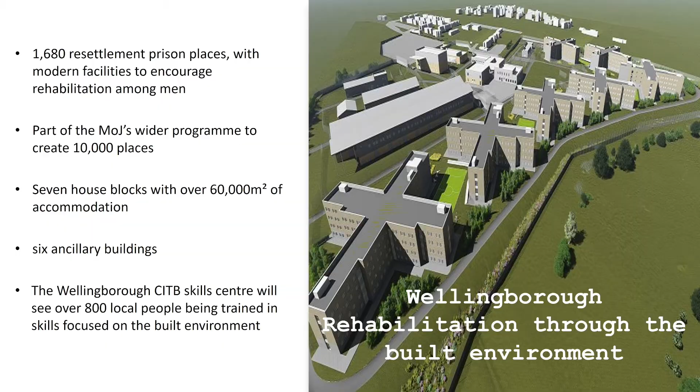Afternoon all. I'm just going to set the scene for my colleagues to present and talk about the hard work that comes together. In the first instance, talk you through the prison, which is a 1,680 place prison based in Wellingborough, and it's on a platform design that will be rolled out to build out 10,000 places across the country. It's a different prison to what's historically been built, in that it's a rehabilitative prison, and it's based around skills and reintegration of society, and its main focus and aim is to cut reoffending.

To deliver the project, we pulled together a supply chain from across the country, maximising digital and off-site, and we're pleased to say we've got two key speakers from PCE, who have integrated the precast for us, and from Mastalloy, who have developed new windows and doors for the prison that we sub-assemble and then take to the precast factories to install. But there's an underlying purpose to everything we do, which is the drive of our clients, and this prison is 70% more efficient than the current stock, which is predominantly Victorian, and has barless windows, which is the first in the UK to do barless windows en masse, and it encourages family engagement and smart buildings.

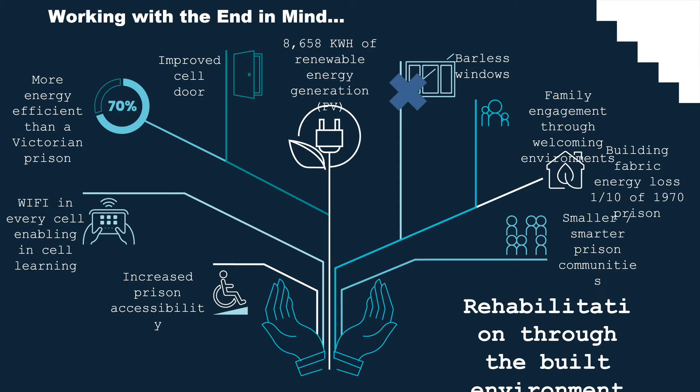Further ado, I'll hand on to Simon, who is our specialist integrator for our precast solution.

Good afternoon. So, I suppose just to give you a bit of an overview of our role as integrator, because it's not a familiar term in construction, but it is relatively familiar in the off-site world. Essentially we're taking the concept design defined by the client, the Ministry of Justice, and the architect and the design team, and what we're wanting to do is dismantle that design and turn it into a kit of parts. The kit of parts can then be manufactured away from the project, and then what we've got to try and do is bring that kit of parts back together and assemble it on site.

Now originally we were transitioning from a different design solution, so there was a piece of work to do around the re-coordination of that design. Essentially we're going to consider all of these points around the circle: program, sequence, digital, logistics, methodology, design management coordination, interface coordination, smart systems integration, supply chain management off-site, prefabrication or pre-assembly or both, cost, validation and continuous improvement, to essentially develop a solution that can be made away from the project and assembled on site.

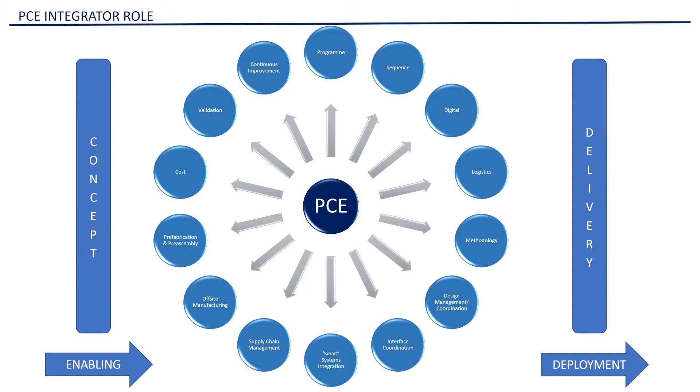Just a bit of an overview of the scope. We're not actually delivering all the project, but the scope that we are delivering, I would guess, represents circa 70% of the project. We have the entry visits building, which is in the top left-hand corner, which is a very bespoke structure. So most things are one-off within this building, a little bit unusual for off-site, but delivered using a hybrid type methodology, combining precast concrete with structural steel work with in situ concrete, essentially to give a fast-track construction solution to quite a complex building.

We've got the CASU, which stands for Care and Separation Unit, which is a specialist accommodation unit up at the top of the site. But then the main crux of what we're delivering is the house blocks, the accommodation blocks. So we've got 7 of these blocks, which are identical, running down the bottom of the site there.

So just to give it a bit of scale, the entry building's about 7,000 square metres. The care and separation unit's about 1,200 square metres. And then the house blocks represent about 60,000 square metres of construction.

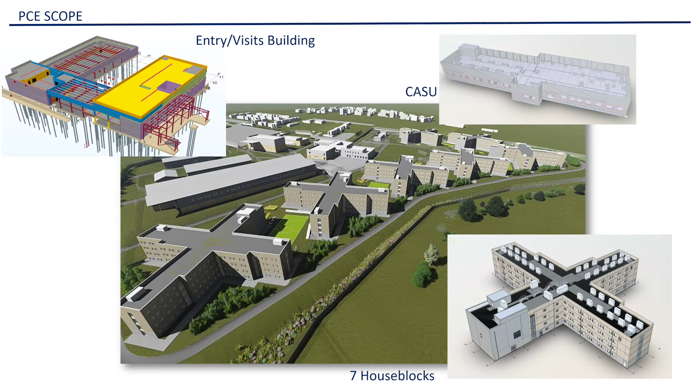Now, one of the key metrics that we worked from was the programme that the contractor wanted to deliver the project. So ultimately, there's an end date the client needs the facility, so we're working back from that end date with the main contractor, and essentially we're configuring a solution around that aspirational date. This brought us to a 40-week programme to deliver the project, which means essentially we've got to construct around about 1,500 square metres per week. Most things that we've done have essentially been configured around that driver.

So, defining the kit of parts, we need to take the buildings apart to put them back together again. The process we go through uses an existing system that we've developed over the years. Some of that work's been done with Kier, some with other contractors, and the Ministry of Justice as a client.

We need to take the functionality and the specification of the buildings, the programme as I mentioned, and critically the logistics and the sequencing. Logistics and sequence is absolutely fundamental to offsite. We need to take some of the systems integration, which I'm going to describe, and some of my colleagues are going to describe in later presentations.

We need to take the assembly methodology, how we actually put this thing back together again. We need to take the manufacture methodology, how we make it away from the site. We need to look at the supply chain and its capacity and capability to deliver a project like this. And then we look at the design solution, and how we essentially dovetail the different design aspects together to give a coordinated solution. All the time we're trying to balance cost and value.

What's probably key, and I hope you'll get this from the presentation—John touched on it very briefly—is that we've got multiple suppliers across multiple specialisms, all working together away from site to bring this thing together as a kit of parts and to give it the smarts that the building actually needs.

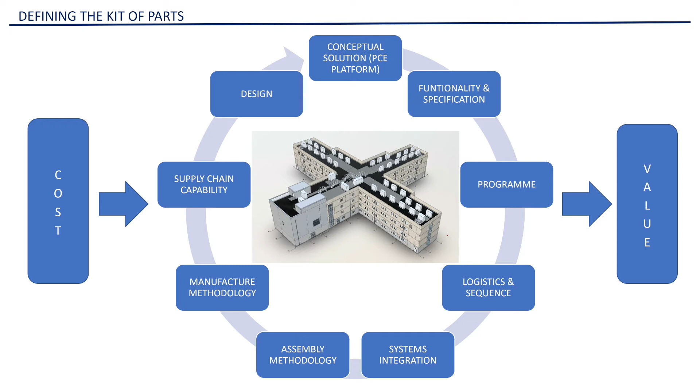So this is just an overview of the house block. There's typically 56 cells per wing, per level, with some miscellaneous support functions on one of the wings. So 3 wings are cells, 1 wing is a miscellaneous support function. The cells are based around a repetitious platform design, which I'll describe in a second.

Those cells contain things like ensuite facilities. They have the power and the data requirements for the cells. Then obviously there's finishes and functionality within those cells as a secure environment. But some of the key aspects of that design solution center around security, durability and maintainability because of the type of facility it is. It's just a brief overview of the platform.

The platform represents about 60% of the house block. So 60% of each of those 7 house blocks is this accommodation module. There's only 4 types of cell, which means there's lots of repetition within this componentization, which means it's really, really important to get the design solution correct because we're replicating it many, many times over.

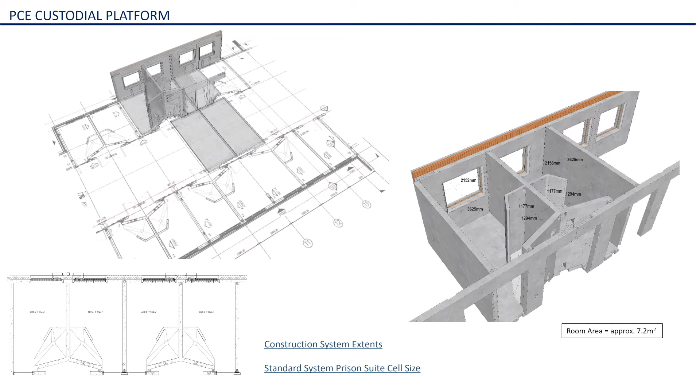But also key to that is the refinement of that design, because when you refine that design, the benefit amplifies across all of those cells as well.

There are 6 key component types. We have an external wall construction, which is a composite sandwich wall construction, where we pre-install the window system off-site. We have what is a special duct wall unit, which separates the cells—a bespoke unit to the prison system. We have some slabs, a mix of corridors and cell slabs; the cell slab I'll describe in a little more detail. We have some partition walls and some corridor walls.

Critical to us is how these components are manufactured, which influences the finishes. Critical to that is also the way these components are handled. Much of our consideration is less about the permanent design and much more about the temporary design—taking the units from the molds, handling the units, stacking the units, getting the units to site.

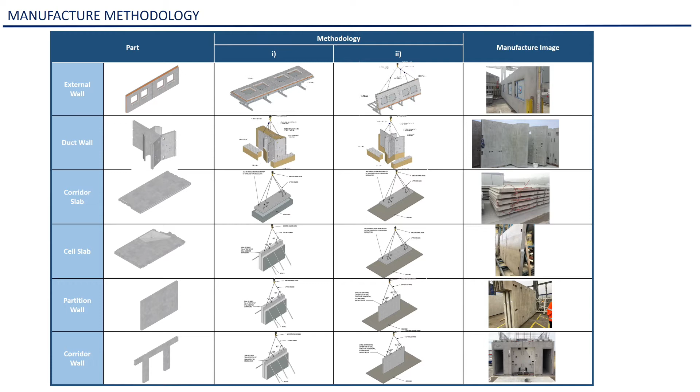We then need to look at the assembly. My analogy is a little like the car industry. If anybody ever walks around the car production line, nobody's ever looking for components—the components are where they need them. That's logistics. And when they take the component and put it into the car, they're not looking how to connect it into the car, it just connects. That's smart connectivity.

So much of our focus centers around the logistical aspects of getting these components where they need to be and when we want them, but also how they connect together, because that needs to be efficient, it needs to be safe, it needs to be effective, and it needs to perform in the way that these buildings need to perform.

Key to this as well is what I described before about the amplification of benefits or negatives. If we get something wrong, it replicates 1,600 times. If we get something right, it replicates 1,600 times. So for every minute we can save, every hour we can save, every little bit of reinforcement we can take out, all of these benefits amplify across what we're trying to deliver for the client.

This just touches on the temporary aspect. The temporary restraint of these components is fundamentally key and has to be built into the design solution, but also the health and safety of our operatives assembling these buildings and any other operatives working on site. So just as much design input goes into the temporary condition and assembly methodology as the permanent condition.

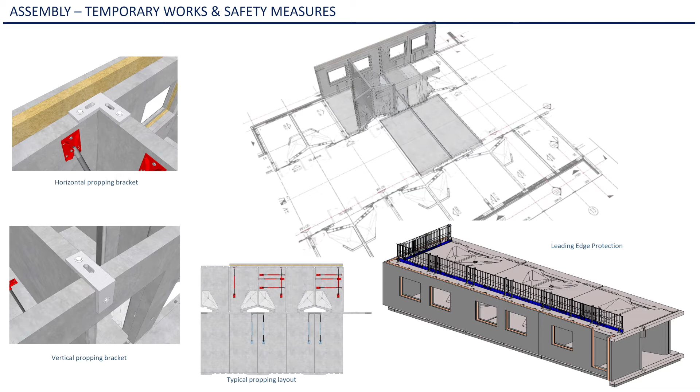This is the cell slab I described before. Within the cell slab, we essentially have 5 off-site suppliers coming together, integrating into one concrete floor slab. The floor slab contains underfloor heating embedded within it to heat and cool the cells. We have shower drains and shower feeds for an ensuite area, and the dished area to take the finishes for that ensuite. We factor all of those things into how the component is manufactured and how these off-site specialists bring these components together to integrate into that component.

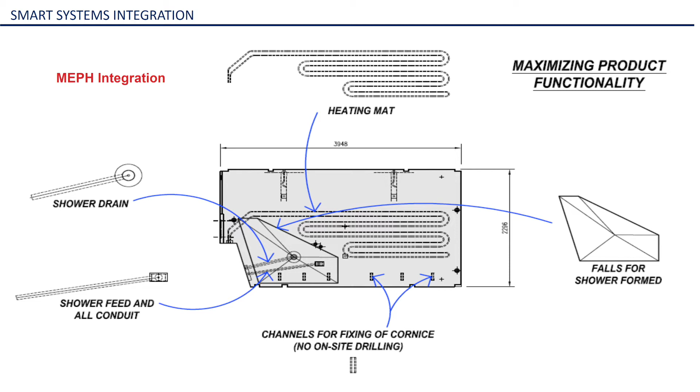This describes pictorially a bit more about the systems integration. M&E is critical to the facility, and the fact that most of the M&E is embedded within the structure, so people within it can't tamper with it, is key.

I touched on logistics and sequencing being key. A lot of work has gone in with Kier and other specialists working with us on site logistics and off-site logistics—the sequence in which cranes move around the site, how we get deliveries to and from cranes, how we work with other contractors and with the infrastructure around the site, which is ever changing. It's quite a challenging site in terms of topography and rainwater, so lots of that has to be considered.

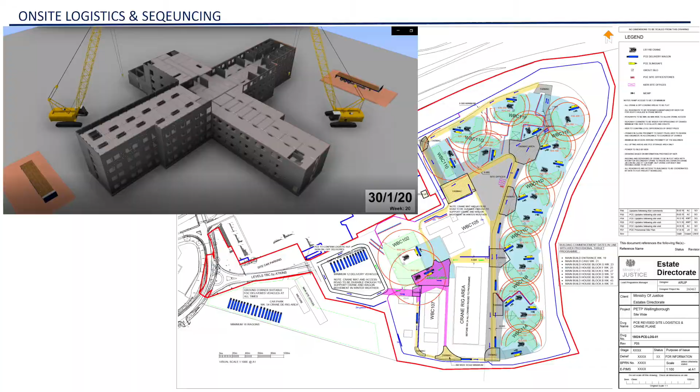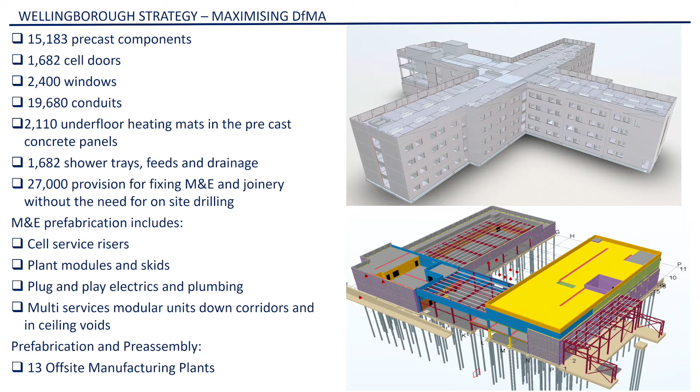Just some of the stats, which might get repeated again later: we've got over 15,000 precast components, over 1,600 cell doors, over 2,000 windows, nearly 20,000 conduits cast into the concrete, over 2,000 underfloor heating mats, and 1,680 shower trays. The list goes on.

Also fundamentally key to us is that what people see at the end is the finished component, but within it we've got the smart integration I talk about, and we've also got the reinforcement. Fundamentally, where things go wrong in our industry is when reinforcement doesn't fit with other components and the two things don't mesh together. This is where BIM and digital has really transformed our industry and our business. Now we're modelling reinforcement in 3D alongside the components, so we can check that all of these things fit together before we place concrete in the units.

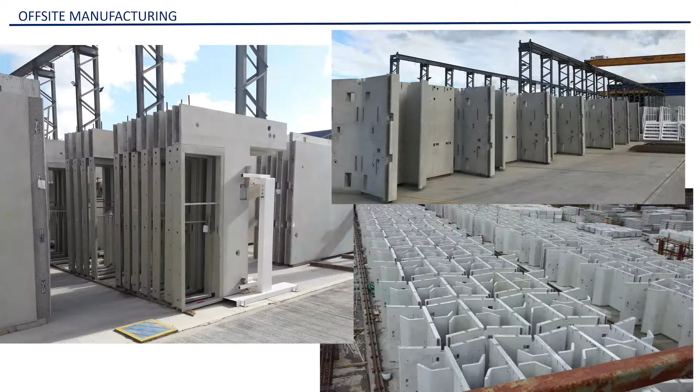This is just some of the units being stored off site. You can see on the left some of the units with the corridor units with the door frame set within them, and the cactus units, which are the specialist unit for the prison cell platform.

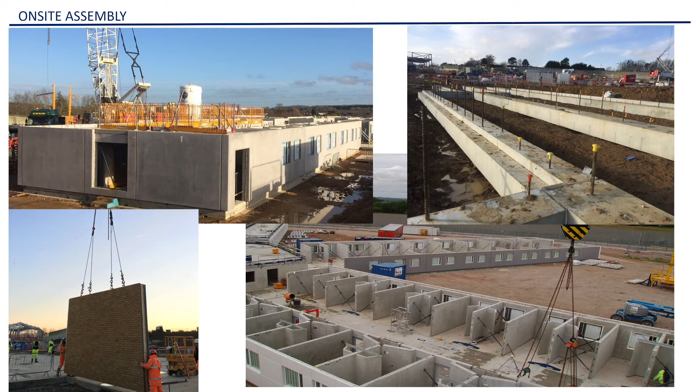Just some images of assembly. We typically construct somewhere between 12 and 16 components per day, with about 10 men per crane, so there's not a lot of manpower on site, but there's a lot of activity. You can also see in the top right hand corner we did precast ground beams on this project as well, so we're starting straight from the tops of piles, trying to do as much in terms of DFMA and off-site as possible.

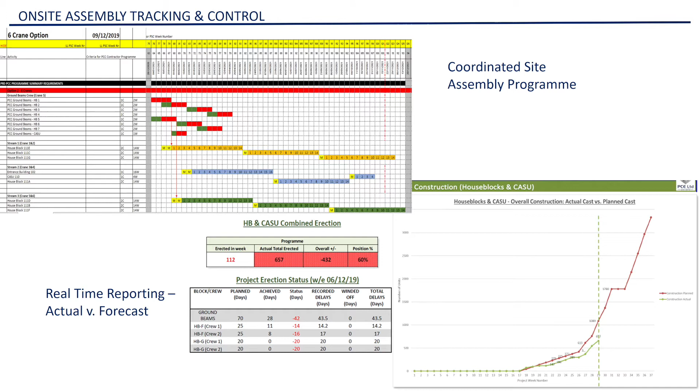Critical to getting this right is knowing where you are at any point in time in the process. So a lot of effort goes into monitoring and tracking the plan versus what we're actually doing. We do lots of things in terms of tracking progress and comparing actual through design, through manufacture and through construction. Rebecca's also going to talk about some of the clever digital stuff that Kier have brought to this project that really helped us monitor that real-time data and track actual versus planned.

Quality control is also a critical facet of what we're trying to manage and deliver. We need to ensure we're monitoring the quality process at each stage of the design and manufacturing process. So we have off-site coordinators working with the supply chain, monitoring and managing the quality of those components at each stage, so that when it arrives on site, we know it meets the specification, it's been validated and verified, and it can then be assembled.

This is some of the information that we produce for the guys to assemble these components, and then we track every component that gets installed. Essentially what we're trying to create is, as my managing director would call it, like a birth certificate for each component. So each component has all of its data about the quality process it's gone through, and all of this can be fed back into the BIM process and logged with that component as the asset management strategy for the client.

And then just moving forward, always looking to improve. So some of the things we have used and are using to develop the platform system for Kier and for the client: we've got past projects and the data that goes with them, the existing platform design, the Wellingborough design, some of the data we're capturing on the project which Rebecca will cover. We obviously have the BIM data which goes with the model, and we're doing some work with the Construction Innovation Hub around platform design, which will also feed into developing and enhancing this system.

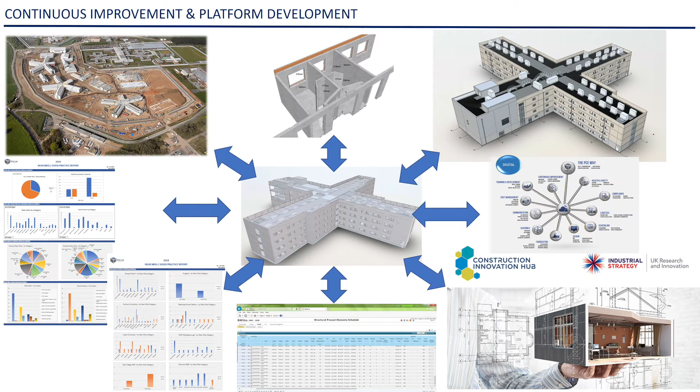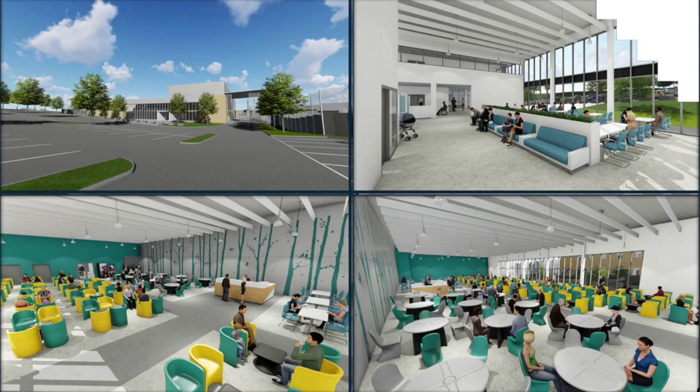Thanks, Simon. So as the guys have said, Wellingborough is really pushing the boundaries, both in terms of the scale of design for manufacture and assembly, platform design, and also digital advancement. And with that, we're really finding that digital tools are to a large extent the glue that helps us achieve some of our wider aspirations. But to achieve that, we need a client that's supportive of a digital drive, forward-thinking people, and as Simon said, a digitally enabled and committed supply chain.

As part of that, as you can see from the image on the board, Wellingborough, as John outlined, is all about trying to find a facility that facilitates rehabilitation for those that will reside there. But actually, transformation doesn't just happen in operation, it's happening for us in part of the construction phase. To date, for example, we've won Digital Training Initiative of the Year for a digital apprenticeship scheme that we pioneered as part of this project. Wellingborough is also the first Kier project that's got project-dedicated data analysts, which is a huge step forward for us.

Our first challenge was how do we reflect and transfer everything in terms of our digital intent and aspirations into something tangible and deliverable, something that can be understood by the many and not just a few. The concept we came up with, and our digital lead is in the audience today, is what we've referred to as our digital mission statement, a jazzy title for what in effect is a digital poster. The idea is that we set the digital scene and explain the various parts of our digital aspirations.

For example, what's the BIM documentation? Trying to take the language of employer's information requirements, asset information requirements, and make it understandable. What's our model breakdown? In other words, who's producing what and why? We're also looking at what digital tools we're using on this scheme, more of which I'll describe in a moment. We also go through our digital workflows, including quite specifically to Wellingborough, our drone workflow. Also looking at our digital calendar to make sure we're setting the right basis in terms of model federation and exchanges.

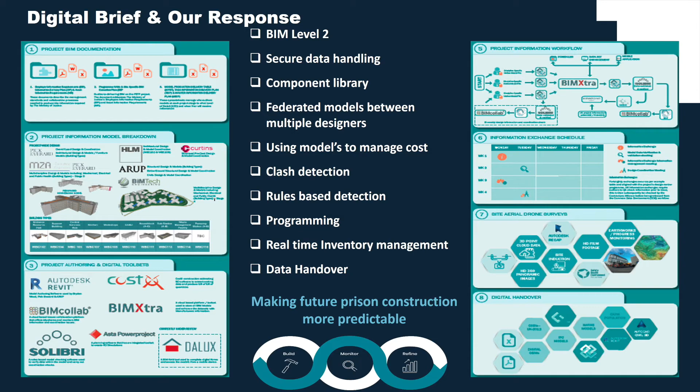At the heart of the document is our digital action plan. This breaks down each of the tasks, assigning them to individuals, determining which is a client requirement, which is a Kier requirement, and what benefit we expect from each. We've linked this action plan to a Power BI dashboard where we can self-evaluate each month to give us a level of granularity in terms of our digital performance.

So our aim at Wellingborough was very much to deliver beyond BIM level 2 and ensure secure data handling throughout each of the project life phases.

For example, from federating the models with multiple designers using these, to developing a digitally rich component library from which we can undertake our fabrication drawings, developing inventories for real-time asset management, and as Simon mentioned, managing progress and quality of off-site and on-site works, to eventually provide a data-rich handover to the client.

I guess the ultimate aim is to create a digital feedback loop by which we can make future prison construction more predictable.

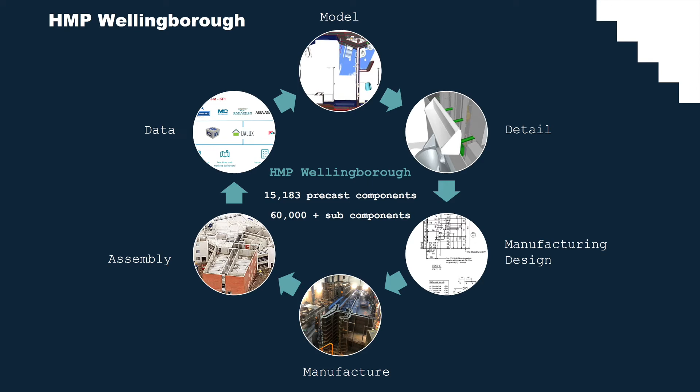Starting with the initial design phase, as integrator for this scheme, Kier is responsible for managing a really diverse team. To give you some idea of that scale, we have 6 design consultants and to date have had over 70 contributors to our project information model.

It might not sound particularly sexy, but one of the important parts is ensuring we get standardisation of naming conventions. So actually looking in the common data environment and finding that we have uniform naming, and using TIDPs and MIDPs have allowed us to link this into dashboards to ensure we have more access to managing the progress of design.

So that digital management at scale can be seen with some of the statistics at the moment. The project information model currently consists of 283 separate models. We've had 18.5 million components go through our Solibri rule sets to date, and we're aiming to achieve a data handover to the client that will consist of over 6 million pieces of data.

Now when you look at a traditional asset handover to a client, probably circa 70% of the maintainable assets are within the MEP sphere. So one of our key challenges was ensuring we had continuity of MEP modelling throughout. At a very early stage we took the decision to use one organisation, BIMTech, to undertake all the MEP modelling from cradle to grave.

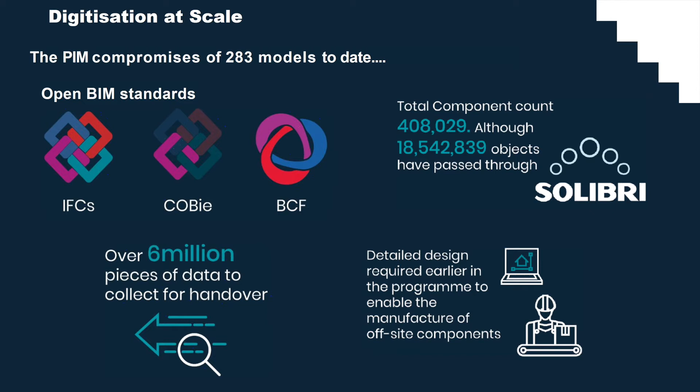All of this is with the aim of focusing on getting detailed design earlier to enable the manufacture of off-site components.

So as Simon's articulated, a key challenge is manufacturing at scale across numerous locations, and that requires really detailed production and quality management techniques. So as well as a team of off-site expediters from both Kier and PCE as specialist integrator, we also deployed Dalux software, which is field BIM technology.

As can be seen from the image on the screen, we translated our component schedule, which was derived from the BIM model, into an off-site reporting tool. This meant that from inputting the data direct into Dalux at the factories, we were then able to visualise this using Power BI and turn it into real-time data management. We could do this by supplier and by component. This allowed us to manage demand in a much more agile way and make more timely decisions.

For example, if we need to adjust on-site build sequence to flatten demand, should production-specific components be delayed, we're able to do that. Equally, we can determine buffer stock levels to ensure the relationship between manufacture and install rates are sufficient. It also helped with providing resilience in the market supply by ensuring accessibility to alternative sources.

As we move on to on-site delivery, we're translating this approach by undertaking on-site quality checks using Dalux via smartphones. When it achieves a sign-off, it then sends an automatic link to our planning software to automatically update our as-built programme.

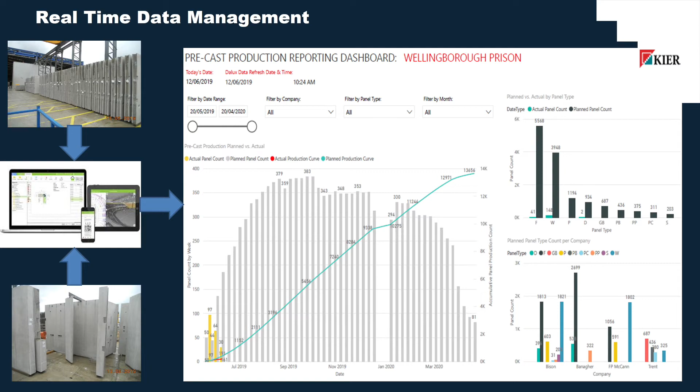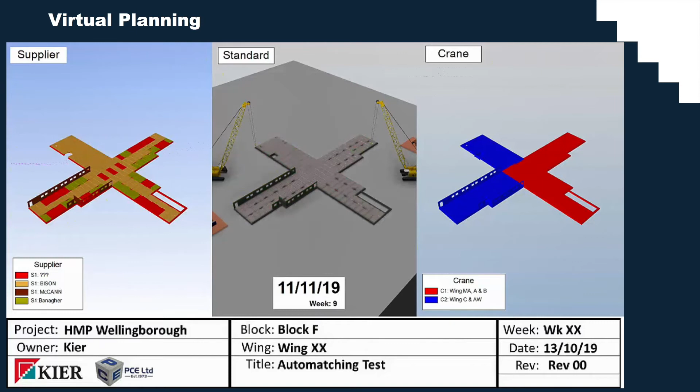This video, whilst looking fairly simple, actually shows how we're linking quality and programme digitally and how we're applying 4D to Wellingborough.

We take the schedule information provided by PCE and push that back into the model via Dynamo. We can then provide further details, such as Simon was mentioning in terms of wagon loads, craneage information, and then auto-match that into our planning software.

The result of that is that we know where each precast delivery is at any time, and that we can react to changes in the programme as they occur.

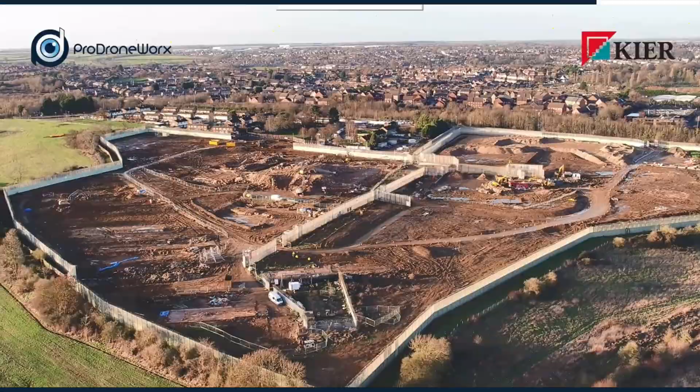We're now extending this methodology beyond the precast panels to other aspects of the build, and also trialling HoloLens to help with visualising programme, which is particularly of help when discussing it with the client.

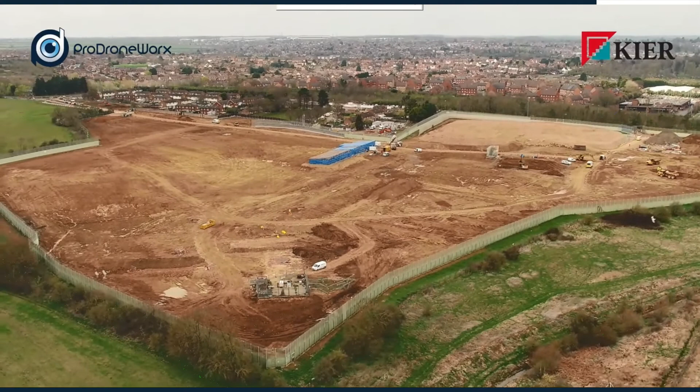As you can see from the video behind me, the other part of digital tools we're using on site is drone technology. The Wellingborough site is circa 11.5 hectares and has a 20-metre slope, so there's significant muck shift. Being able to closely monitor that cut and fill was really important to us.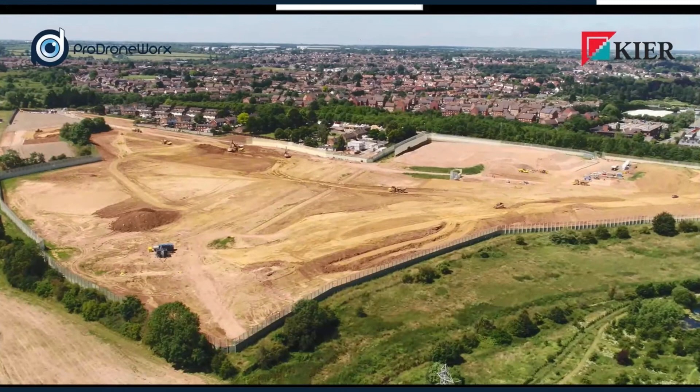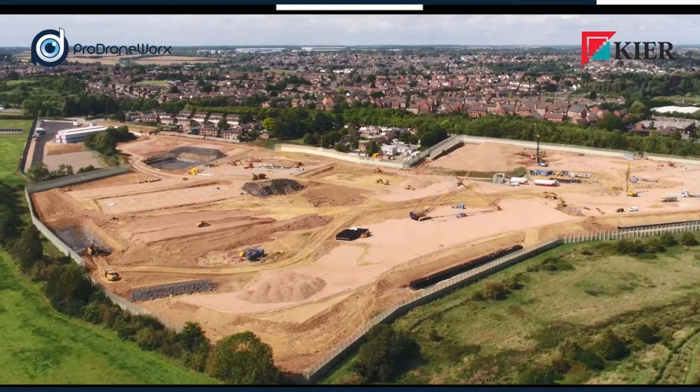But so was safety, and actually traversing a site of this scale with traditional surveyors would have taken a couple of days, so you'd never have got a true picture because of the rate of wagons going out the door. Using drone technology for the surveys provided greater efficiencies to us, as well as taking operatives out of a dig area and away from big machinery.

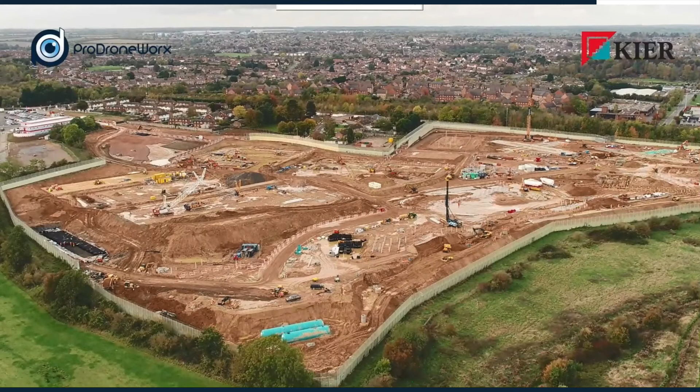How did we do that? Drone tech would come to site and, in simple terms, fly the drone, take a number of photos to overlay to get a 3D model of the site. We would then tie that into known ground control points to really tighten up the survey and provide a point cloud.

We could then take that to compare it to our formation levels for the new prison and automatically generate our cut and fill report.

This had massive benefit and is something we're now looking at taking further, in terms of how we use that drone technology to monitor progress as we go.

Hopefully that gives you a snapshot of some of the digital tools we've been using on site in Wellingborough. Now I'll hand over to Simon, who will discuss a little more about digital use in the off-site manufacturing facilities.

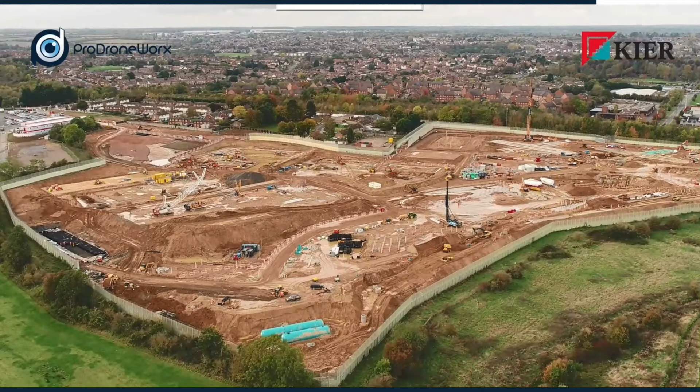Afternoon everybody. I'm going to take you on a little journey on where we came with doors and windows for the Wellingborough project, which were central to the delivery of the project.

So we look at the start. There was a vision that the MOJ had, which was to have a window that had no bars in it. Conventional prison windows have vertical bars to stop the prisoners getting out, but they're very Dickensian in their look. It was also important that the cell window was compliant with current building regulations from a thermal efficiency point of view.

Ultimately, it's a prison window. It had to be secure, it had to have good ventilation, and obviously Kier and the MOJ are looking for good value for money as well, so it had to be cost effective. And we knew from day one that the construction method would be precast, so we'd be absolutely on the critical path from day one.

So we designed a new window. We took the bars out of it. We used SolidWorks, which is our 3D modelling tool, giving the advantage of being able to share the model both with the client and with our supply chain partners. Once we'd designed the model and proven it, we had to go through testing.

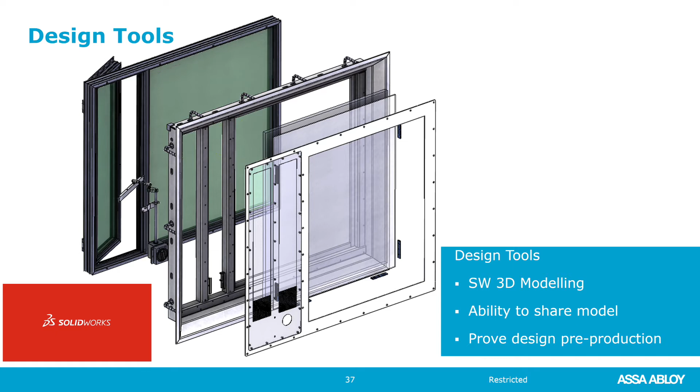As you can imagine, on a prison, taking bars out of windows that have been there for decades is a big step. The MOJ were very, very nervous about it.

We had to test the product thoroughly to their approval and standards. The first one you see on the screen was one that went wrong. It got very close, but wasn't quite good enough. We managed to get a hole in it big enough to get a prisoner out.

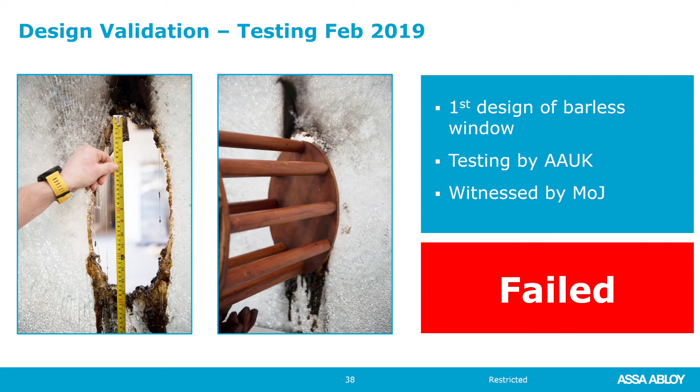Not deterred, a month later we started again, same window but a different glazing system. It passed the test that the MOJ placed on us, and it got signed off for use on this and future projects.

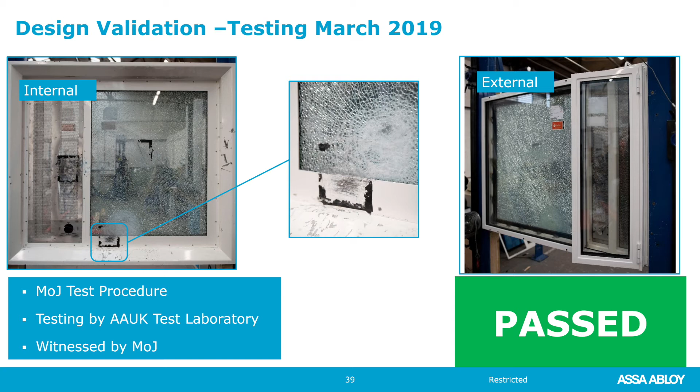We also looked at doors. The prison uses steel doors. Traditionally those steel doors have been a welded construction. They didn't look very good, there were lots of witness marks where the welds were.

They looked very industrial. We use bonding processes, rather like they use in aircraft manufacture now, for the bonding of two metals. It's far more efficient and practical than welding. It looks a lot better, but more importantly it's very, very robust and resilient.

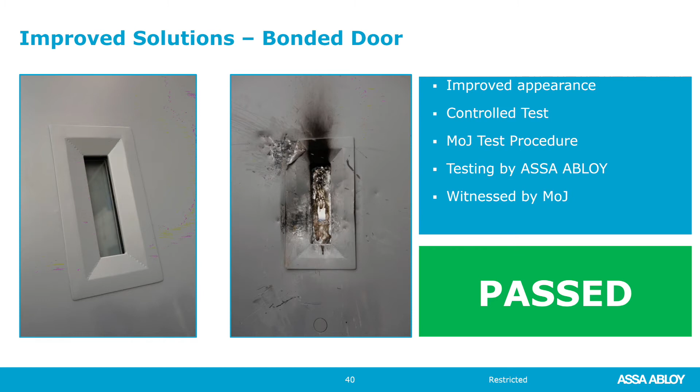And again, new technologies had to be tested. Finally, on the NPI process, every cell door in a prison has a little plug in it, used should there be a fire in the cell. That allows staff to deal with the fire without necessarily having to open the door. These devices are known to block, which is a problem for health and safety, so we designed a new product - given that we were looking at a new door completely, it seemed the right time to do it - and went through the approval process with the MOJ.

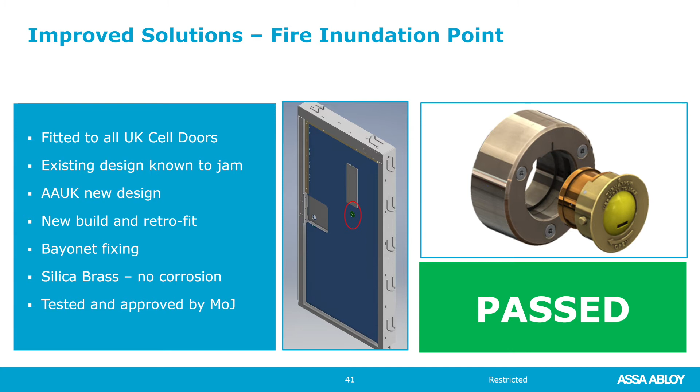Engagement was very important for us at the early part of this project. Kier, it's fair to say, came to us. They looked at our technical capability, which was attractive to them. They saw that we had efficient factories, we knew how to make things efficiently and to the volumes required. We had BIM and digital capability.

What that enabled us to do, for all parties really - Kier, the MOJ, Mace as well - was to work in an open workshop environment, and lots of trust was built up, lots of open discussion, and that really drove the project forward.

Once we'd got a contract with Kier, everybody's happy, so we had to now deliver the project, and deliver it better. The tough challenge straight away for us was that the windows we were looking to supply were a new product. We didn't have a factory to build them in or a production line, so we had to create that from scratch.

Ultimately the beat rate we had to supply into the precast yards was 80 windows a week. Doesn't sound like much but these windows are pretty big units. So we created a dedicated production line, mapped the process, brought in lean process and lean efficiency. We needed to make them efficiently and eliminate waste in the manufacturing process. We had suppliers, and had to make sure that supply chain was managed. We had 4 of our individual sites manufacturing components, bringing it all together in the main factory in Wolverhampton.

Kier were very clear from day one that we had to have absolutely crystal clear quality plans that we were working to and adhering to, so sign off at every step of the stage. Then we had to develop an entire process, get the staff on board, create a production line, and commence delivery within 8 weeks from the contract signing. All tough to do, and so far so good - we're delivering on time, keeping the yards busy, which is good, and keeping the site fed with components.

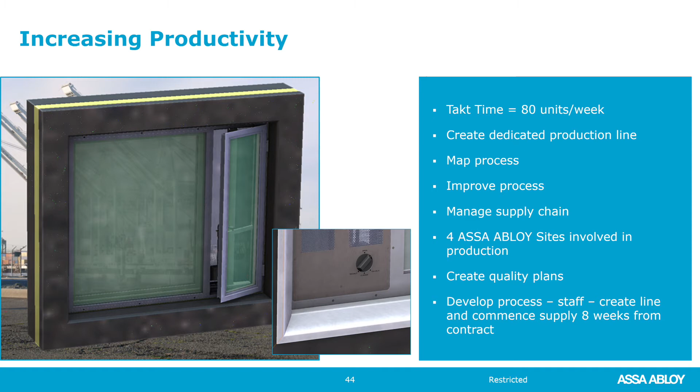I mentioned about the doors earlier. Each of the red dots you see there used to represent a weld on a traditional door - a lot of welding. We took nearly 70% of that out by using bonding processes rather than welding. It's faster, it's cleaner, it's a better job.

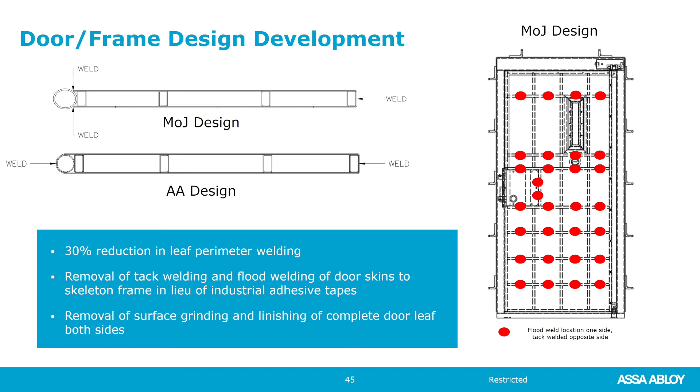We also looked at how we produced the door frames. Door frames are on the critical path, they're all precast in the yards. Doors were cast at the rate of 60 units per week, and we were feeding multiple precast yards. So we looked at the sheer number of components we had and said, look, we're not going to do this all in-house - let's engage with the supply chain and get pre-cut components coming in the order that we need them to feed our production.

Second area we looked at was automation. Traditionally, doors have been made entirely by hand. We said this is crazy, there's efficiencies to be had, the doors are all very much the same - we should be putting robotic equipment in. So we put a robot into our plant in Lisbon, and we also put a robot into our plant in Bedford where the window frames are produced.

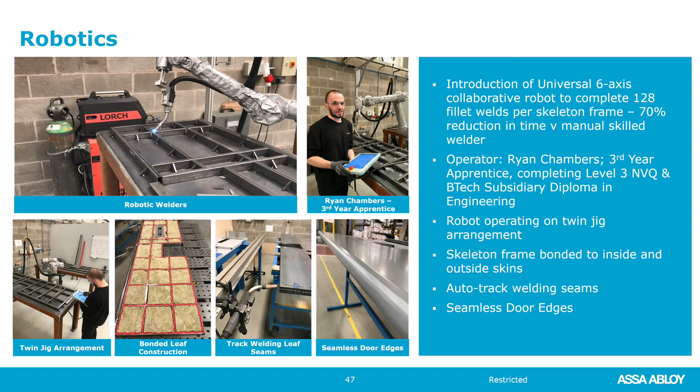Rebecca mentioned about driving skills forward. One of the guys that did the programming and development of this robotic cell was actually one of our third-year apprentices. So it's his first big project, and that's delivering very efficient and good productivity for us.

So a quick update on the delivery plan. We started in July. We've finished the windows this week, which is good, so all the precast yards will have all the windows they need. Doors are slightly behind in terms of the plan because they come slightly later, so the door frames will all be done this month, and then door panels start to go in. We're installing those in the coming months.

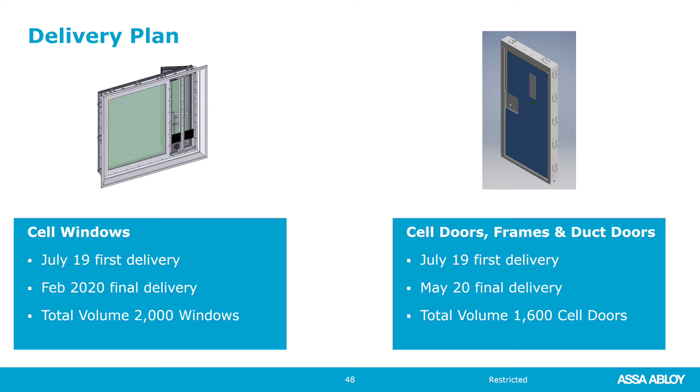So a very good project, lots of challenges, and we just hope we can keep this going with the planned build for new prisons that the government have committed to. Now over to Neil Appleton, so he'll do a closing statement.

Right, well thanks for the kind introduction, and crikey, what a fascinating project. Proper integration of modern technologies right across the supply chain. I work in Catapult world, and we see these technologies and we live and breathe this, but this is a real project that's pulled all this together. It's phenomenal. This is the future, I think you'll agree.

So I'm going to deviate slightly from what we've heard about. As far as I know, there were no fibre reinforced polymer composites used on Wellingborough Prison. I work at the NCC, part of the HVM Catapult. We're down there in Bristol. Seven centres, we all work collaboratively. You'll know certainly MTC, who've got a bit of a presence here, and some of the other names you'll recognise.

The HVM Catapult centres are all government funded, and we take the fantastic innovations and inventions coming out of academia, factories, and people's sheds that are a proof of concept, and help them de-risk and get through the industrialisation process so that the UK can take advantage of them.

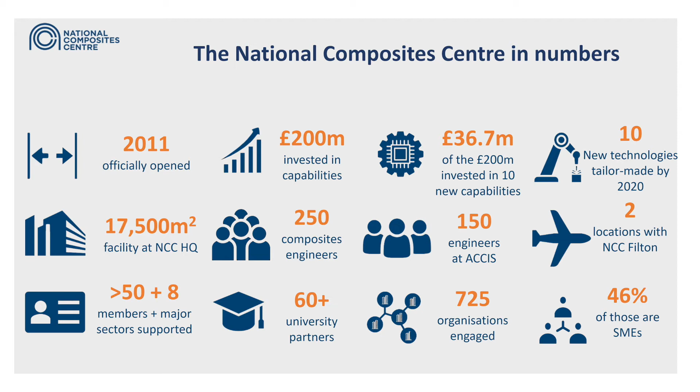So when I was asked to do this session, I was asked to talk about what technology pulls, what interest are you seeing? And I thought, well, actually, I'll backwind to the 2013 construction strategy. Just as a reminder, this was very salient, and we were actually doing this - we were looking at reduced costs, reduced carbon, faster delivery, productivity, and all of this good stuff is starting to happen. Perhaps not at the rate that government wanted, but it's happening.

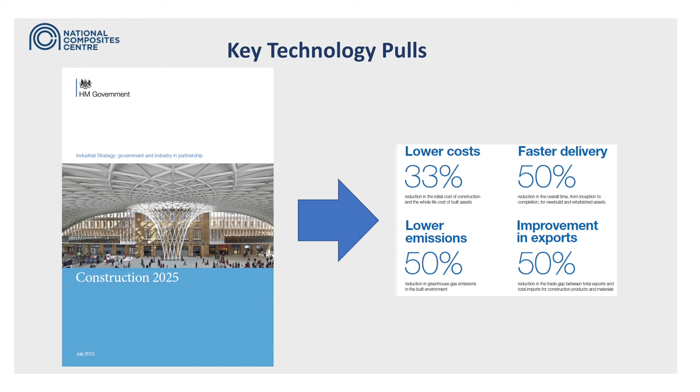In relation to this, what do we see at NCC? The pulls that I see off my client base are massively around sustainability at the moment, particularly around carbon footprint and circular economy. In fact, all of the themes that you'll see around here today are very true from all of the client base.

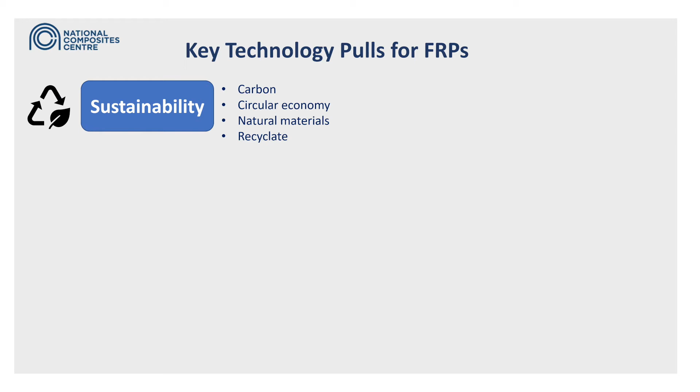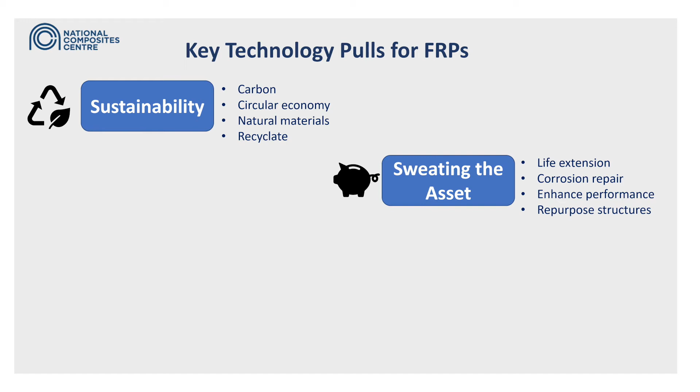We're also seeing a massive pull from our large infrastructure asset owner customers who want to maintain use of their assets in an assured, safe manner - sweating the asset is the coined phrase for that. But it's not just painting. We're seeing life extension of structures, conversion of offices to houses with different load duties, raising the height of existing structures. How do we repurpose? Whole life cost is a massive piece of the agenda for a lot of customers, particularly around corrosion and the cost of corrosion.

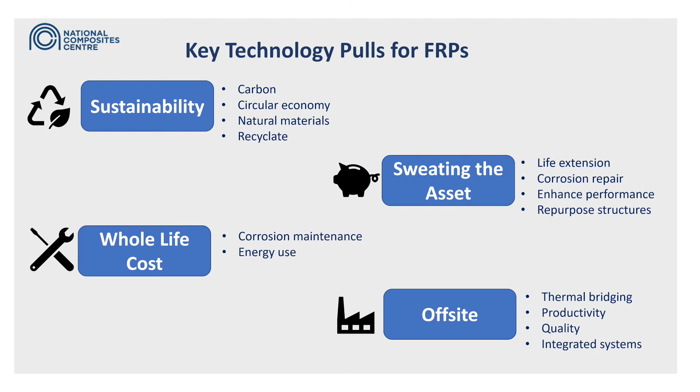And we're seeing a massive pull as construction goes off-site. Off-site, as we know, embraces productivity, quality, assurance, and integration of technologies, but it comes with issues around thermal bridging potentially. So, where do composites fit in around this?

Durability is one of the key elements. The typical materials we're working with, you'd recognise them as the materials you build boats from. So they're eminently resistant to water, that's why we make boats from them, and they don't corrode. So no galvanic corrosion. They are low weight, they can be incredibly lightweight. There's a reason you use them in space satellites. But in construction we use low weight, so that enables easy handling, reduced mechanical handling, reduced logistical costs, and it can reduce foundation loads accordingly.

Conductivity is a fascinating one. Composites are a whole group of materials, and we can tune them to do what we want within certain parameters. So we can make them thermal insulators, we can make them thermal conductors, we can make them electrical isolators or electrical conductors. We can tune these things. That is an incredible, powerful technology.

Carbon footprint, of course, is significant. The materials aren't generally a low carbon solution, but very much associated with bringing low carbon, sustainable construction. They offer a wide range of different form and finish, and I'll show some pictures later to elaborate on that. And of course, they're manufactured in a factory, often with highly integrated digital manufacturing techniques, so repeatable quality.

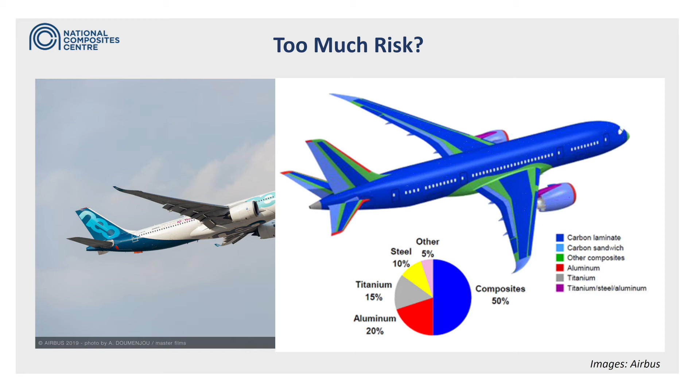But I quite often get the pushback: there's too much risk associated with them. On that illustration, the blue and the green are composites used in aircraft airframes, which hopefully starts to change the risk profile of new materials. So I'll go into talk a little bit about some examples, case studies that we can relate to.

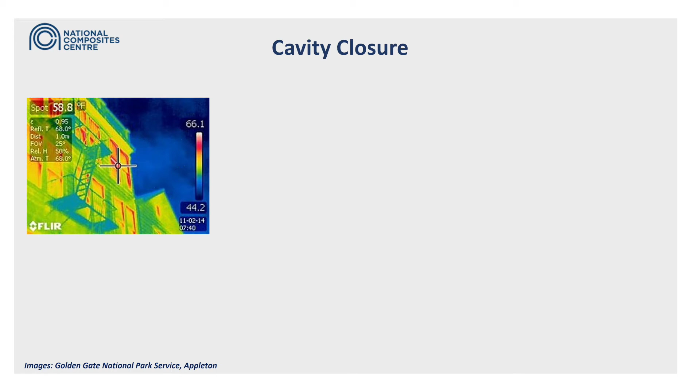We're familiar with this issue, particularly around off-site modern methods of construction. How do you trim the insulation cavity? How do you support a door in an efficient manner that doesn't bleed all the heat outwards?

We're familiar with steel, great material, but it's fairly conductive, 50 watts per meter K thermal transmittivity. Aluminium, 90 - that's why saucepans are really good out of aluminium, they're fantastic for passing heat, heat sinks, brilliant. Glass fiber composites, you're down to about 0.3. So graphically, I'm guessing people at the back probably can't even see the bar line there for FRP materials.

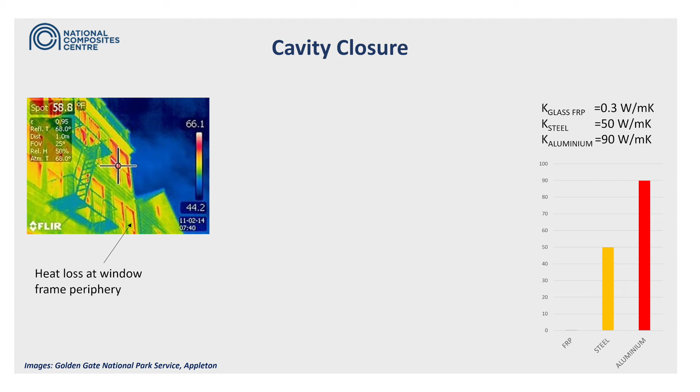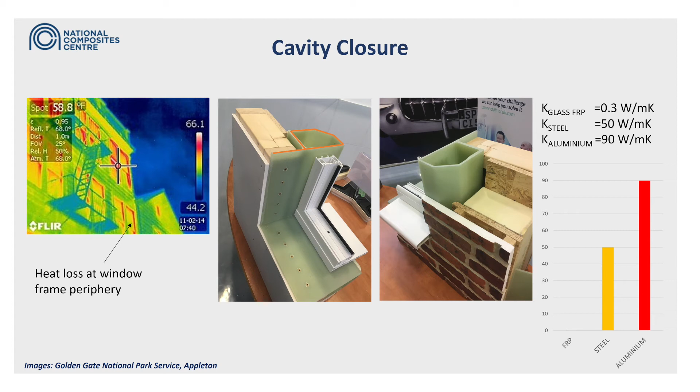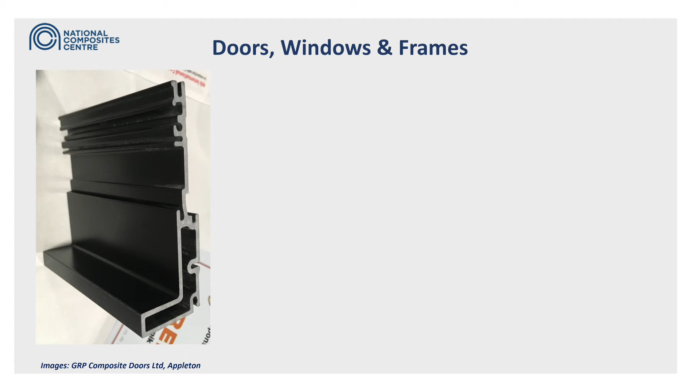And as an aside, a lower technology, or a more mature technology rather, is if you're doing that, why not construct window frames in composite? Granted, perhaps not for Wellingborough Prison, where you've got naughty people who are going to try and kick it apart. Likewise, doors are very much doable in composites, and a lot of modern, high-quality doors are now composite.

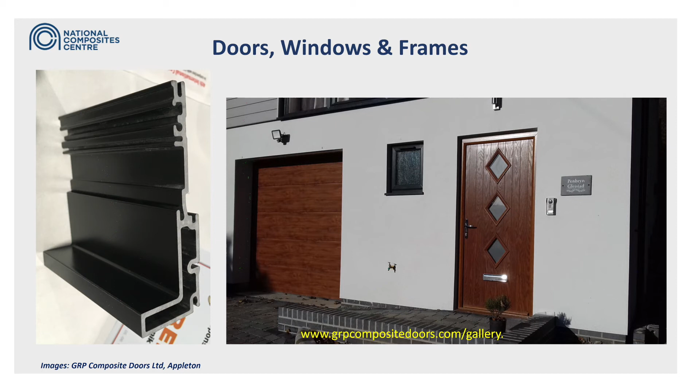The tools for this were created in composite. They were additive manufactured using a carbon-reinforced polypropylene. So that is plastic reinforced with very short fibre.

When I started looking at additive manufacture, the machines was kind of this size, and you thought, yeah, it's great if you want a steering wheel, but it's not got a place in construction yet. You can now additive manufacture, well, I think the recent demo I saw was a powerboat, so it's getting bigger and bigger. And of course, that is a digital process, so you're taking the CAD model, the BIM model, digitally manufacturing the tooling, so you've got that nice golden thread through the process and assured product geometry.

Also, the material self-releases, which I understand is fairly important in precast concrete and quite useful. The tools also didn't deteriorate, so there was no rework on the tools and no rework on product as the tools got older. And at the end of life, you grind the tools up and you put them back in and you make more tools.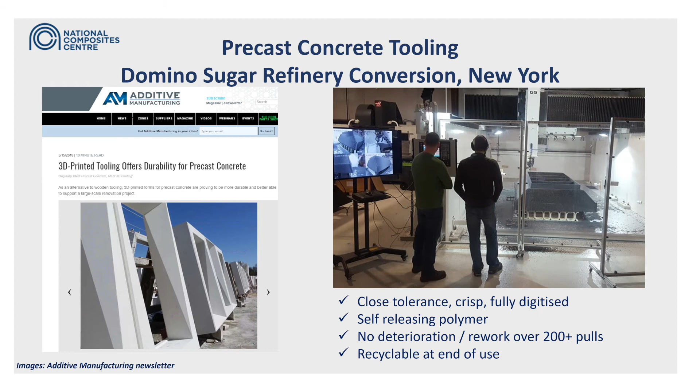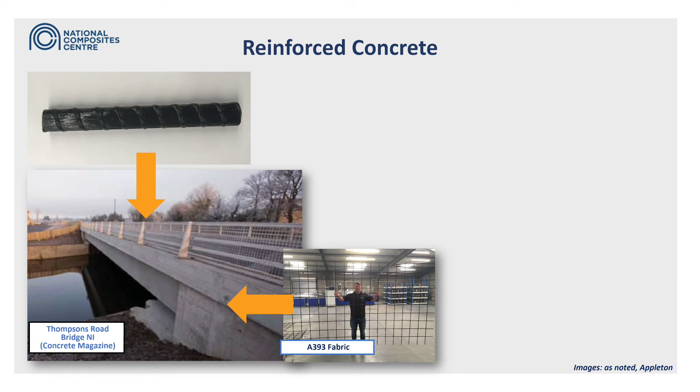Around reinforced concrete, composites have a place to play. This is Thompson's Road Bridge, full HA loading in Northern Ireland, and that was reinforced with this stuff - this is basalt fibre composite rebar. And that's a bit of A393 fabric with my friend Yuri, just showing how light it is. There isn't a sky hook out of frame on that.

The beauty of it is it's a non-corroding rebar. It's also lighter weight and easier to handle. The rest of the world's embracing this ahead of the UK. Eurocode 2 is going to address non-metallic rebar, which is out within about 18 months, I believe. So this is going to become widespread in the UK. I suggest you keep a definite eye on this.

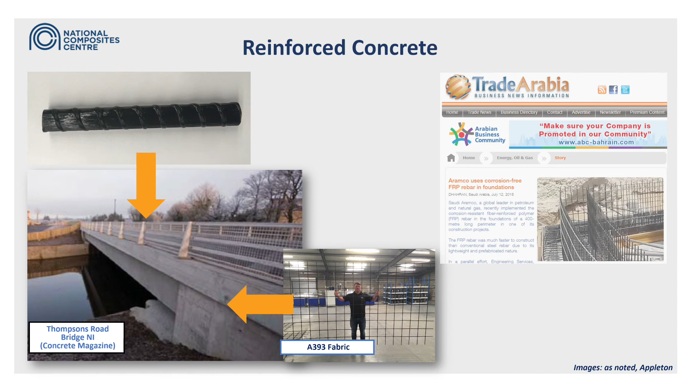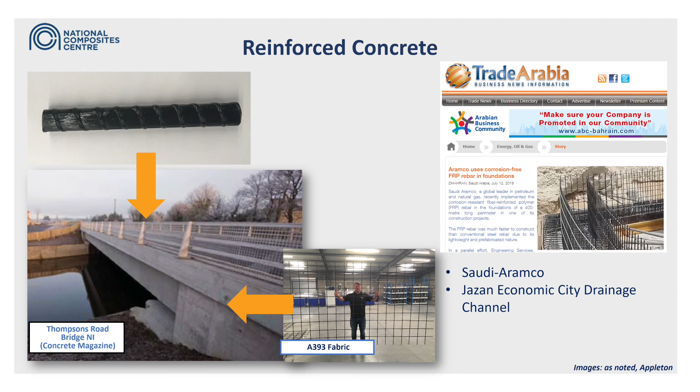In Saudi Arabia, Saudi Aramco now mandate non-metallic rebar, i.e. composite rebar, for all of their groundworks because of the cost of corrosion. They've recently constructed a drainage channel for the Jazan economic city. That drainage channel was 21 kilometres long and had 11,000 kilometres of rebar. This is not a demonstrator, this is real world.

This is happening. Interestingly, on that project, the rebar was selected for corrosion resistance, and they won a 30% productivity gain by using these easier to handle, lightweight materials. So, reduced maintenance through corrosion resistance, and potentially you can start looking at reducing cement content. Do you need such a high cement content if your rebar cannot corrode?

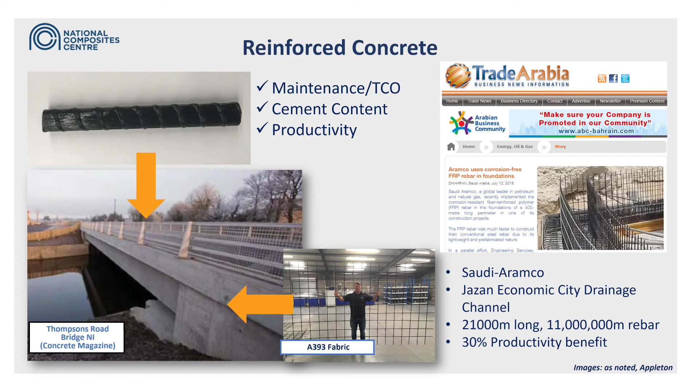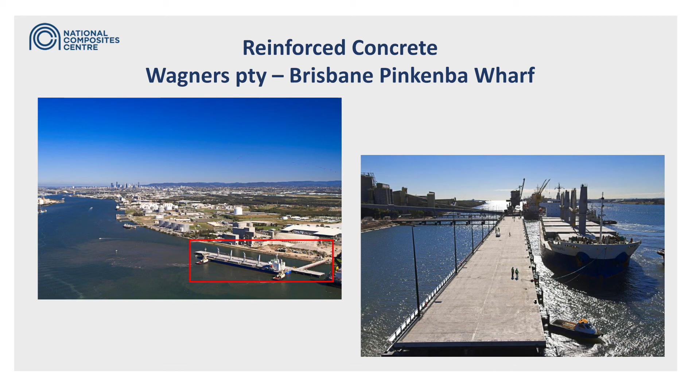Following that example through, a little bit of the future vision of concrete. This is in Australia, at Brisbane, by Wagner's, a concrete company. And it's this unloading wharf here. The substructure was composite structures, but that's not the exciting part. The deck's the exciting part.

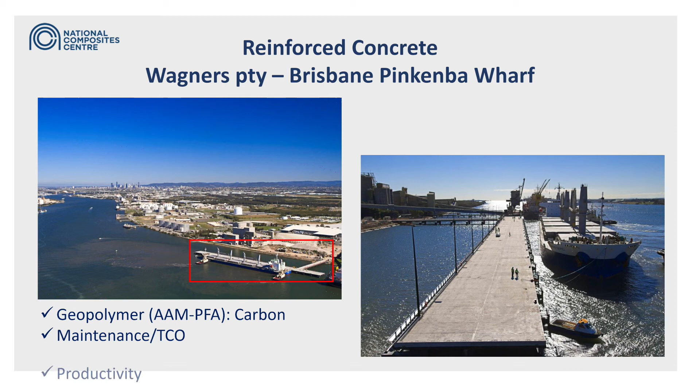That was geopolymer, so no ordinary Portland cement used within that concrete formulation. It was all alkaline activated fly ash, reinforced with composite rebar. So no concerns about durability, bringing these maintenance benefits again, and a productivity benefit into the bargain.

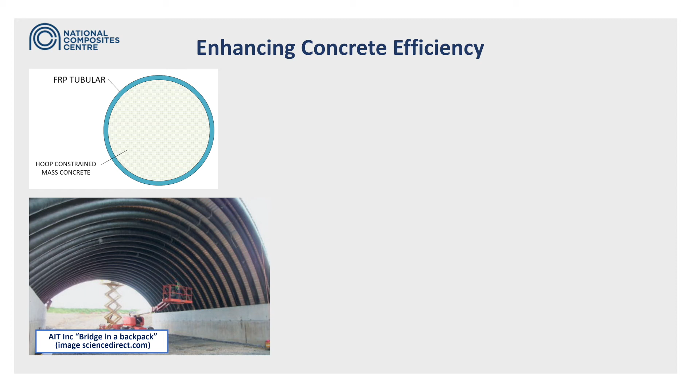For those of you who studied civils, you might remember that if you can constrain concrete axially, you enhance the compressive strength. Research is showing between 6 to 8-fold improvements in compressive strength. So you take a C50 mix and you're getting something like a C300, C400 equivalent by having this constraint around the outside. You can make a much more efficient structure - reduce concrete, reduce carbon, faster, leaner, more efficient.

Illustration of it going together. I would say this is demonstrating the high productivity, but as with all things, there's a crowd of onlookers at the back watching it going together. But you can see less temporary works, more efficient use of the concrete, so reduced carbon footprint, better productivity.

There's a whole lot of work going on around new forms of concrete, using both metals and composites within them to exploit different properties. I'd recommend anyone to look at the Acorn project out of Bath or the work coming out of Queensland.

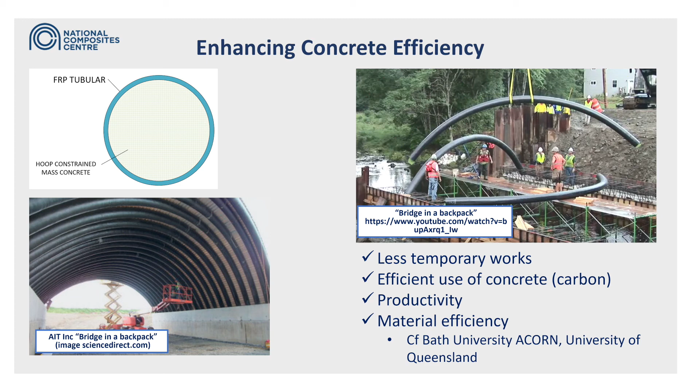Life extension, talked about sweating the asset. This is a bit from my past. This isn't a building, this is called an oil rig. These corrode like merry hell, and they repair the corrosion by bonding on composites. That is restoring the strength of corroded structure with composites.

All of these elements I've been involved in rehabilitating. And some of these, like process piping, I've worked on 50 bar, 20-inch gas pipe. The caissons down at the bottom, they're typically a metre diameter, and you can kind of see they're getting a bit of a push off the ocean there.

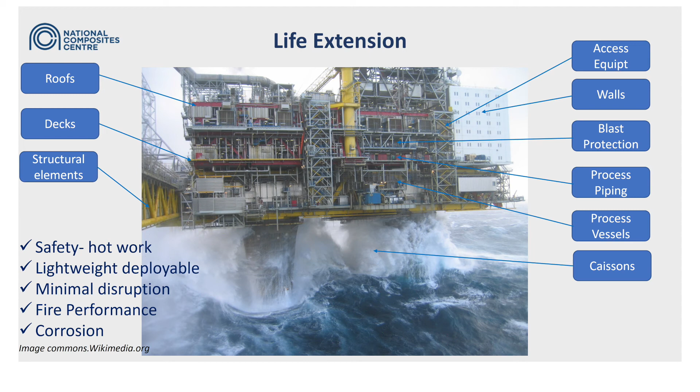And I set the scene earlier, form and finish. What can we do with composites that's a bit different? Again, drawing on the rest of the world for some great examples. This is the Museum of the Future. This is a composite clad structure.

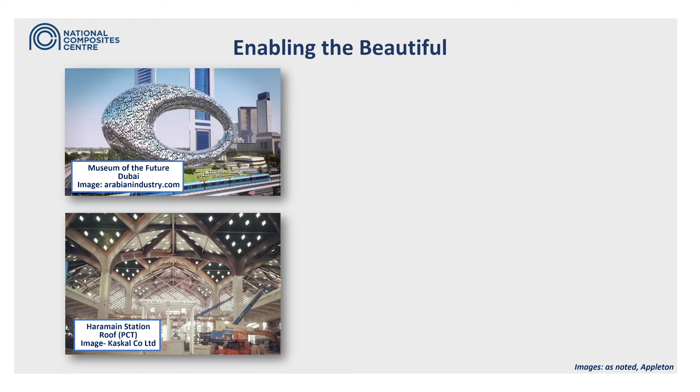This is Haramain Station in Saudi Arabia. The roof of this is composite materials, enabling a beautiful structural form. And closer to home - it's actually bigger than the photo makes it look - this is at Saltash, and this is the Celtic Cross. This is wholly composite, no coppersmiths involved in the construction of that. It's all in the material.

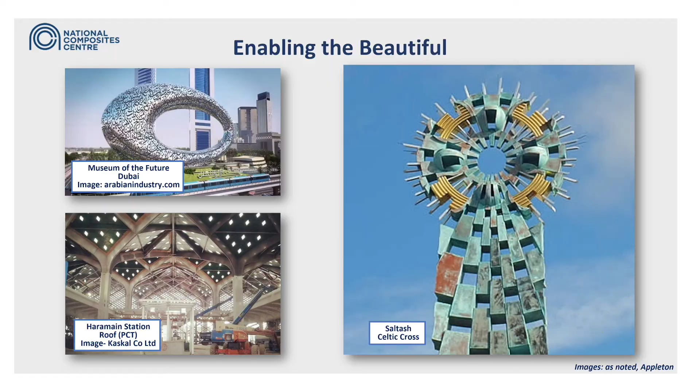Just to seed the first question to the panel to get the juices flowing: phenomenal project and brilliant integration, but how did the customer react to the level of innovation and risk that goes with it that you were bringing? And were they happy to embrace more basic, lower TRL innovations?

Over to the floor, John. They're very keen to innovate, but technical readiness is really important in that they've got an asset that needs to be maintained and usable through its life. And so technical readiness - that's why we went through so many testing processes in things like the windows.